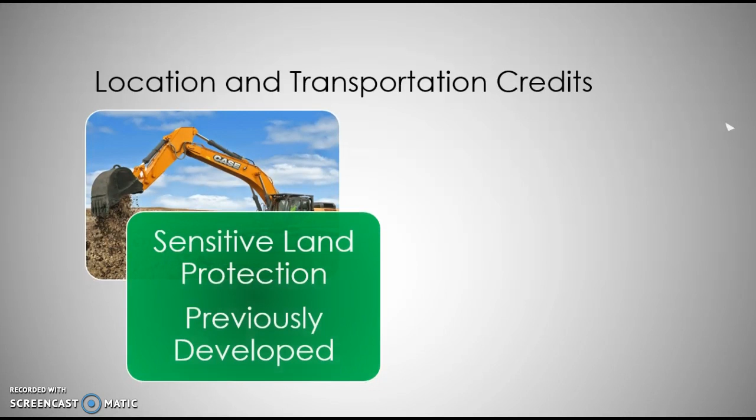For that, I have gained several credits for location and transportation. These include sensitive land protection, as I gained a credit using a previously developed site, and surrounding density and diverse uses, where I gained 2 credits for meeting the surrounding ability to have lots of people in a small area with varied businesses.

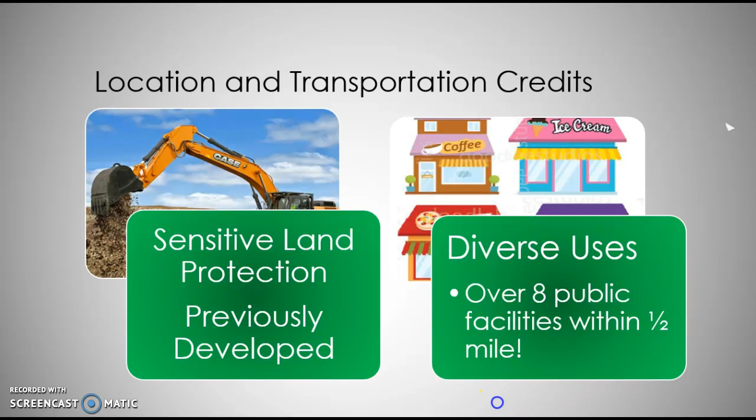I also have access to quality transit, where I have enough public transportation located close by to gain all these credits, and bicycle facilities, where I'm installing 2 shower bath units in the lowest level with a bike rack room for occupants to meet this credit requirement.

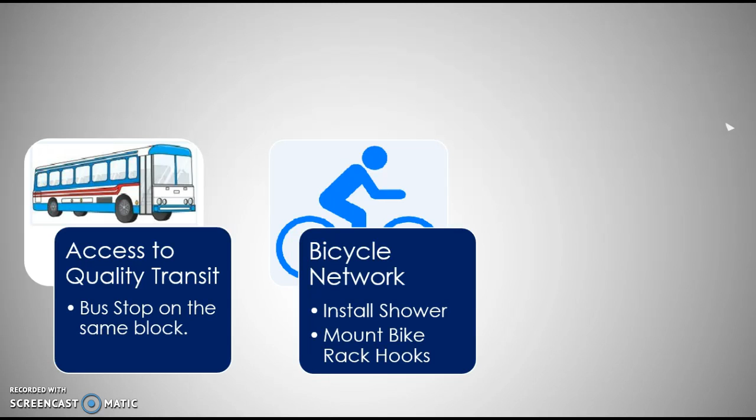I'm also going to have a green vehicle credit, where I designed the building to be up higher, and the first floor will gain parking, so these can be installed for electrical charging stations and preferred parking.

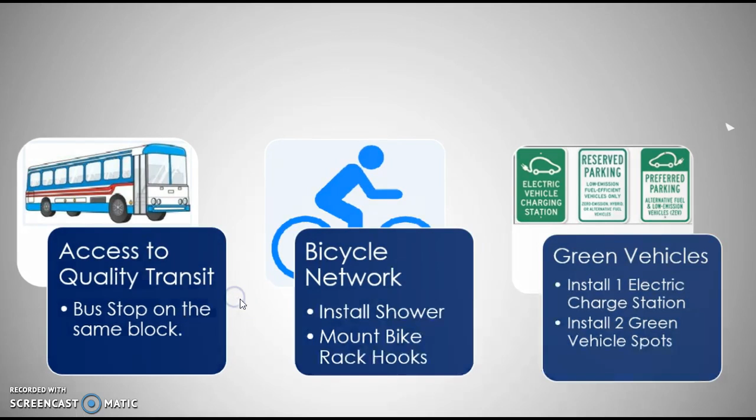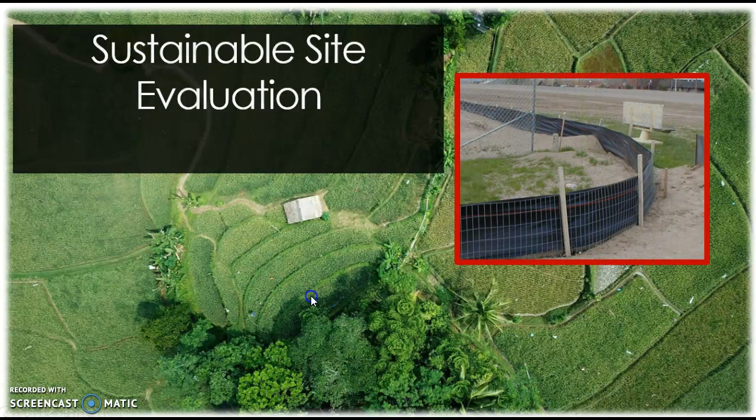For the sustainable sites concept, I also have the prerequisite of needing to install site protection. For this, I would install silt fence, as this would prevent any contamination outside the site.

For sustainable sites, you have site assessment, which I would hire a survey company to provide the required information and documentation. They would be doing site development to protect or restore habitat, and I can also have them provide all kinds of information included in that.

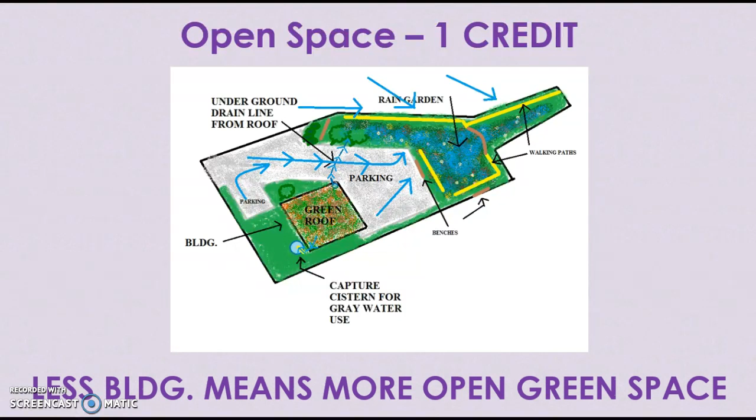Part of the credit there is open space, where 30% of the site will be used as green space and available for recreational use, which you can see by this photo.

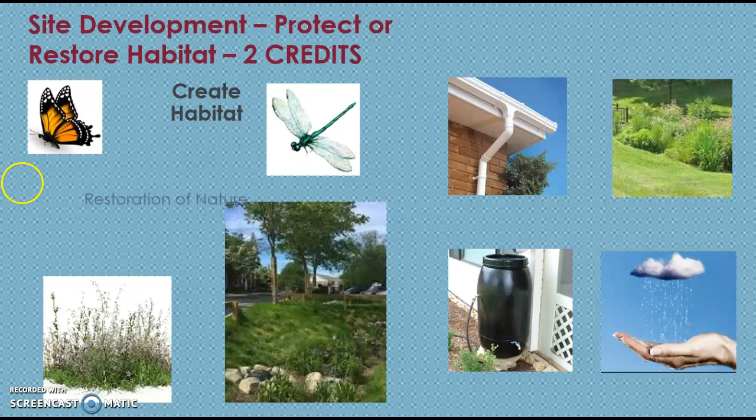Site development is also part of restoring and protecting the habitat, and it would be restored using a rain garden with native plants, which would also help protect wildlife after restoring it.

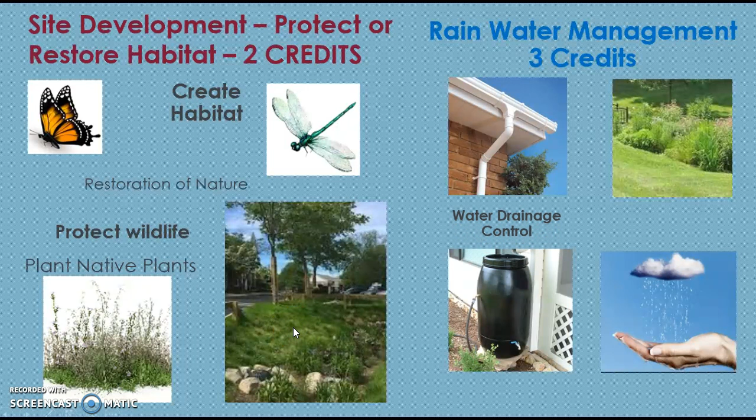For the rainwater management credits, I would gain the ability of having 3 credits for not only water drainage control, but the rain garden and the cistern to capture water for reuse.

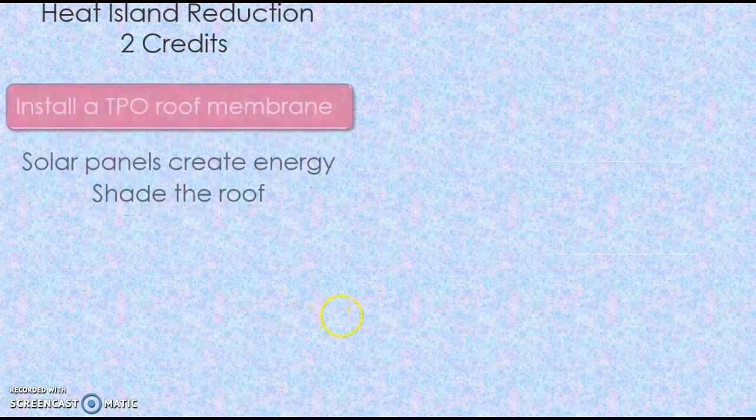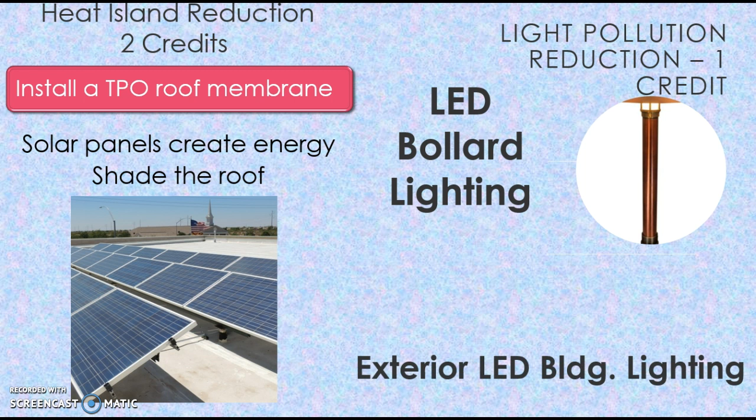As a heat island reduction credit, I would install a white TPO roof membrane and solar panels to help shade the roof as well. For light pollution reduction, I would be installing downward-facing LED bollard lights and LED building lights that also face downward, which will help prevent light pollution.

As prerequisites, I would be required to have an indoor water use reduction, which is water sense label fixtures, outdoor water use reduction, where I provide vegetation that doesn't need irrigation, and I also have a rock garden that won't need water. Any water I need outside will be from the cistern.

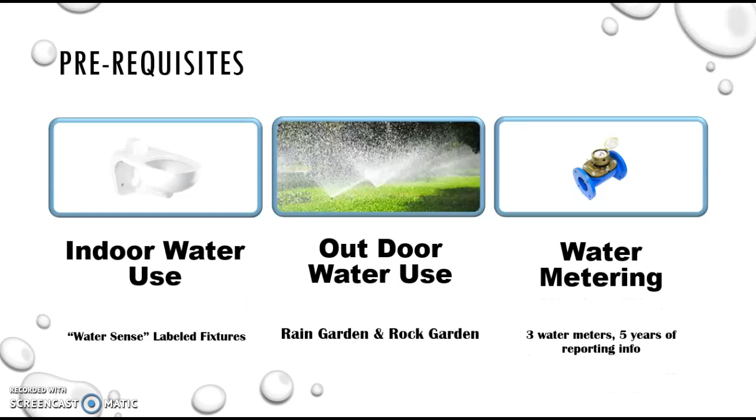I also need to install water metering. Matter of fact, I need 3 meters and 5 years of reporting to cover this credit. I'm not covering the cooling tower, however, because I found my project to be too small for that.

For the energy and atmosphere aspect of LEED accreditation, I also have my prior prerequisite of fundamental commissioning and verification, where I would hire a third-party commissioning agent to perform the work and provide the documentation needed.

I would also have building level energy metering to meet this credit. I'd also have my electrical contractor install metering systems to meet that credit.

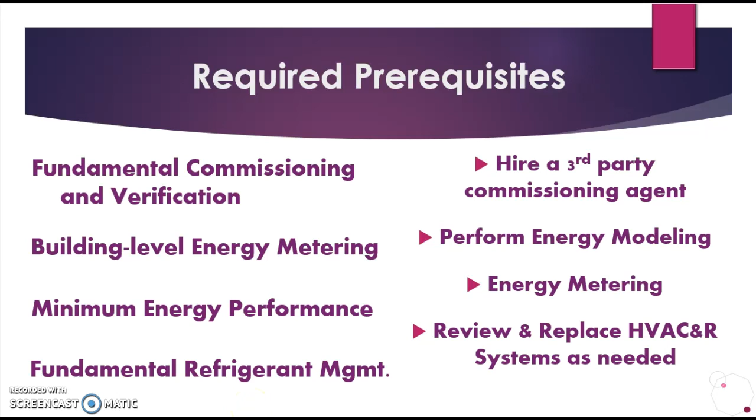Minimum energy performance rating is where all my appliances come in, and the electrical company can provide the documentation for that. I also have fundamental refrigerant management, and this would be provided by my HVAC contractor as a requirement for the installation of his materials.

For enhanced commissioning, I'd hire a second outside commissioning agency to validate all current and ongoing information.

For optimizing energy performance, you'd have your electrical contractor provide documentation, which you would compare everything, document everything, update that information, and track and submit it.

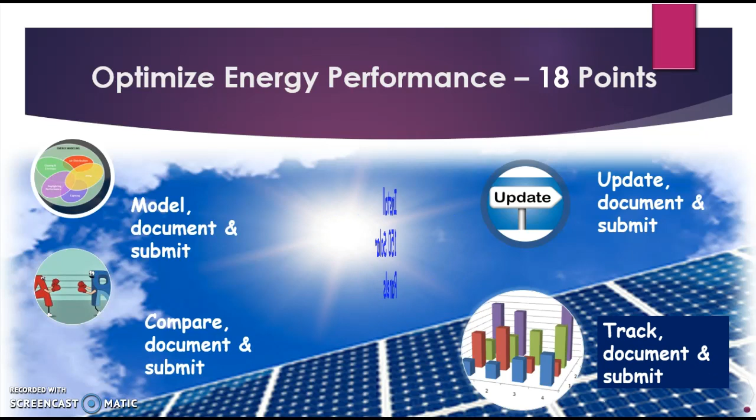It also includes installing 150 solar light panels, and that goes towards my renewable energy production, where I gain 3 credits.

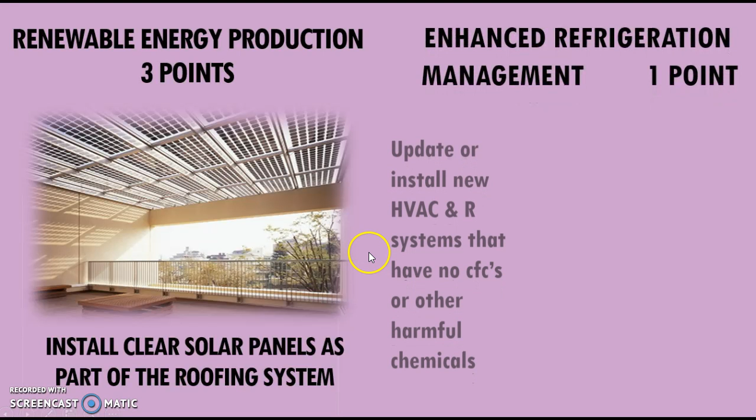For the enhanced refrigeration management point, I have the HVAC and R systems that have no CFCs or other harmful chemicals, and that information is again provided by the HVAC company.

For advanced energy metering, I would have the electrical contractor install metering devices for the solar panel and battery units, as well as continually provide the metering information needed to monitor it. I'd also have a battery-powered backup to assist with this.

For the green power and carbon offsets, I would be creating my own energy and selling it back to the local grid, which nets me green RECs, which can be documented as green power.

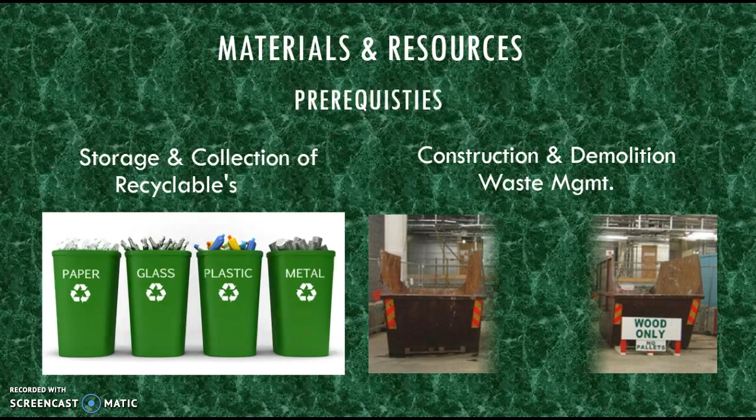For the materials and resources department, I would have storage and collection of recyclables as a prerequisite, with at least 4 types of bins and documentation of their use. I'd also have construction and demolition waste management planning, where I develop and implement a construction demolition waste management plan.

Building product disclosure and optimization, environmental product declarations, I get 2 points, where I could have all this documentation provided to me by my subcontractors. I would also have my certified environmental product declaration and my sourcing of raw materials for post-consumer materials, and they would all be kept well documented.

As part of this, I would also have my construction and demolition waste management submit the documentation for recycling, reuse, and adhere to those requirements.

As a building life cycle impact reduction, I would remove and install a minimum of 50% of the building materials used on site, and or install reclaimed materials from local contractors. There's a lot of materials out there, and these will also help with my acoustical properties.

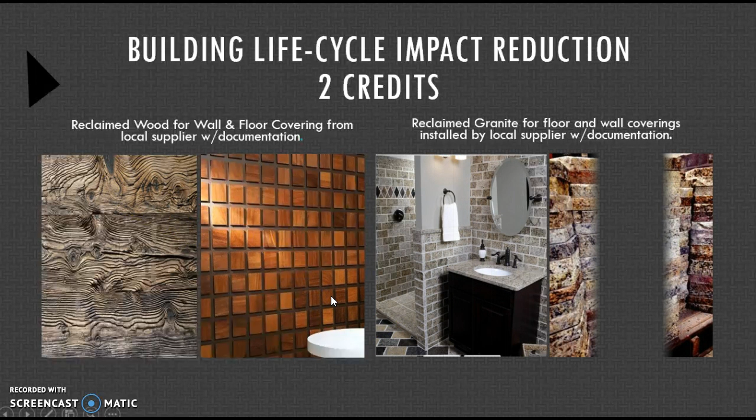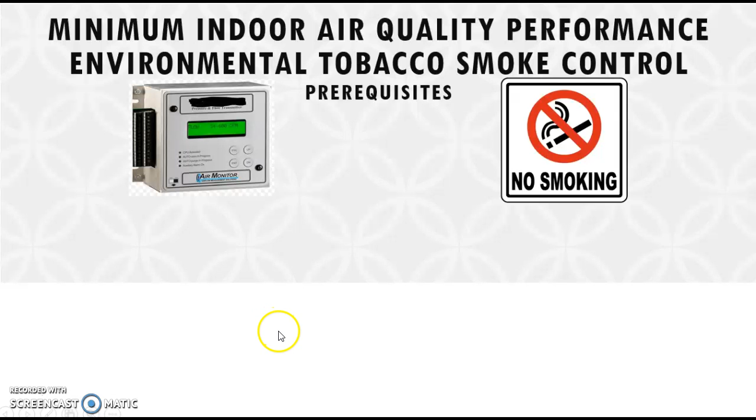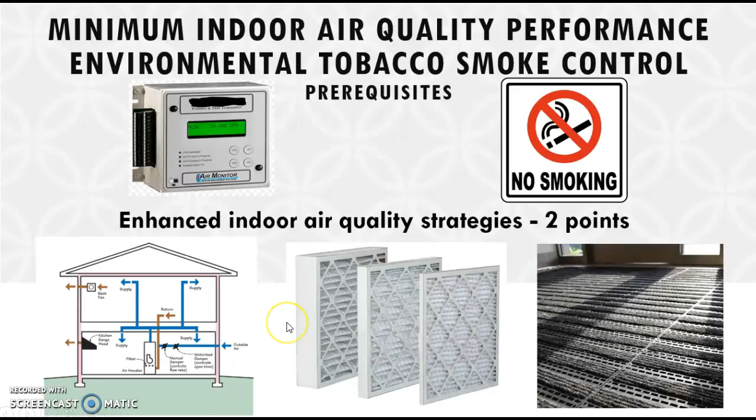For the enhanced indoor air quality strategies, I would include airflow testing, filter installation, and entrance mats to prevent pollutants from coming into the structure.

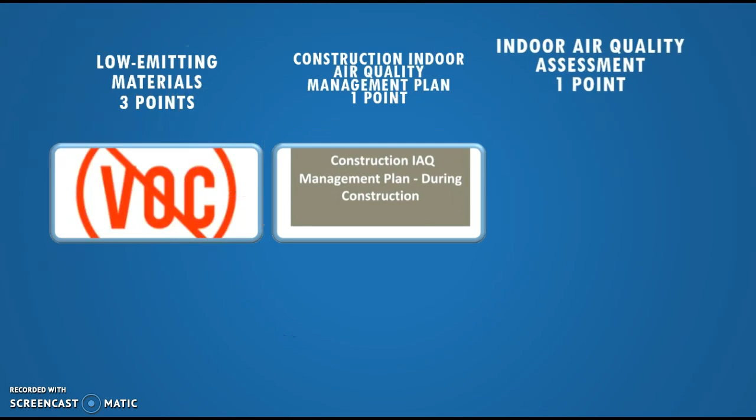I would also have low emitting materials or low VOCs, with the exclusion of those, to create, submit, and follow a construction indoor management plan, and in it perform an indoor air quality assessment, which is a test, and make corrections as needed.

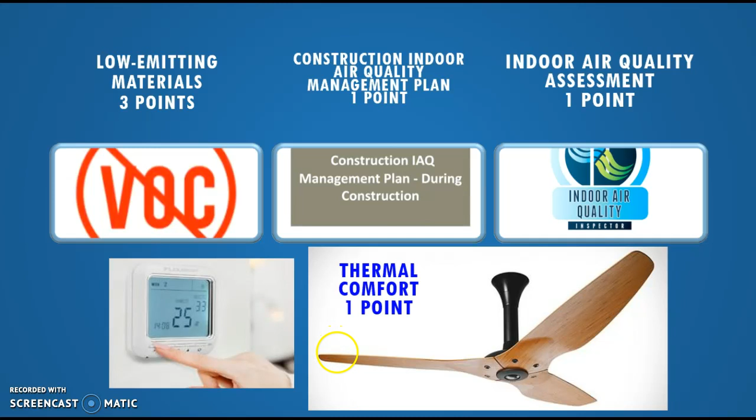For thermal comfort, I would require the HVAC contractor to meet those requirements of standard ASHRAE 55, and set a set of standards for the indoor environmental conditions to achieve acceptable thermal comfort for occupants of buildings.

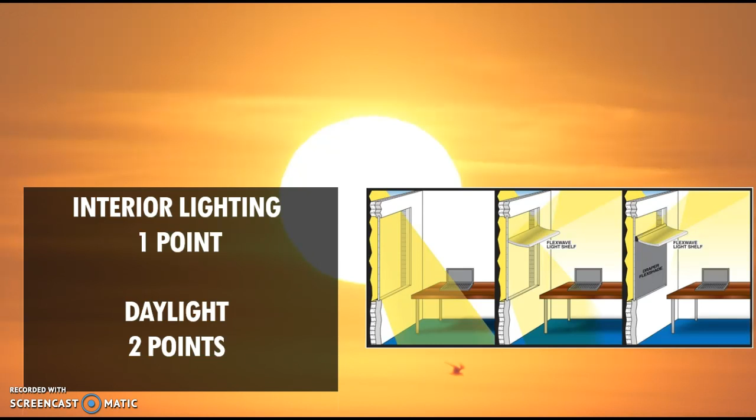I would also have installed light shelves, blinds, and interior colors to balance out the credit requirements.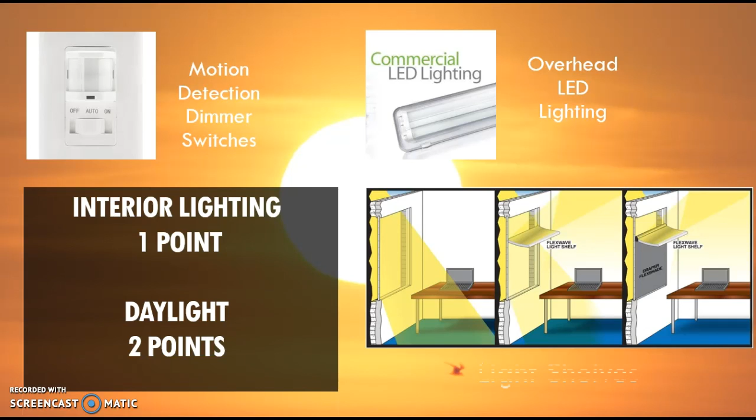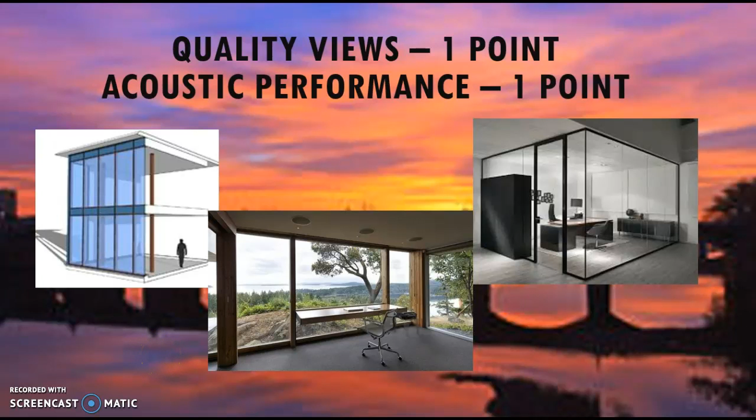For quality views, I would install a curtain wall around the majority of the structure for optimal site visual beautification, and the rain garden will help this, as well as the river view. Any interior walls would be glass, so it will not only assist with the acoustical properties, but bring in a great deal of daylight.

As part of the innovation qualities, I did not chase down any additional methods or innovative ways that aren't already mentioned, as I didn't see the need for such a small project.

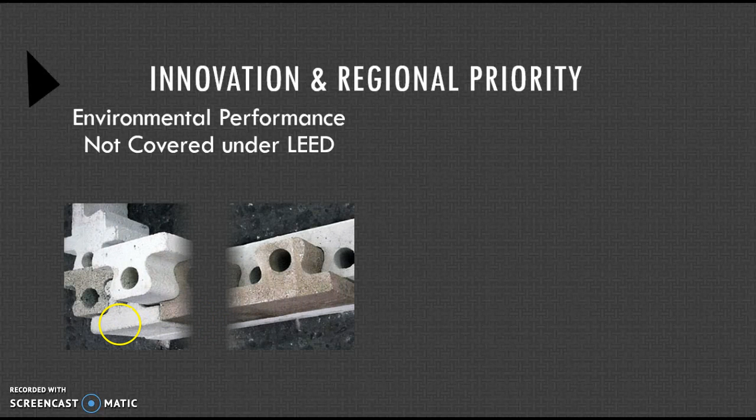I'm also going to have a principal participant of an accredited professional to help me determine if I'm following the right path.

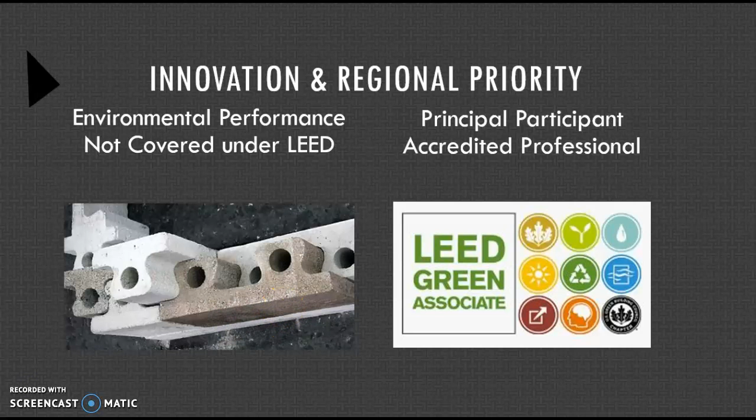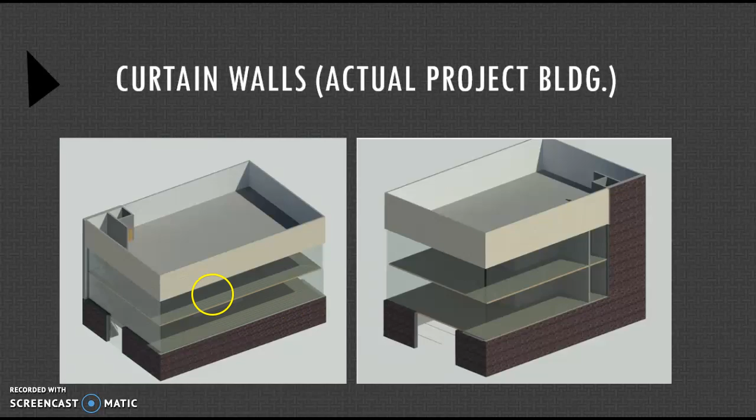And you can see the ultimate floor plan layout. Here you have the very first floor where there's an elevator shaft and parking, as well as a bike rack. The second story has the elevator shaft, stairs, utilities, kitchen, bathrooms, storage. And the third story also has stairs, elevator shaft, vestibules, and storage here, here, and 2 restrooms.

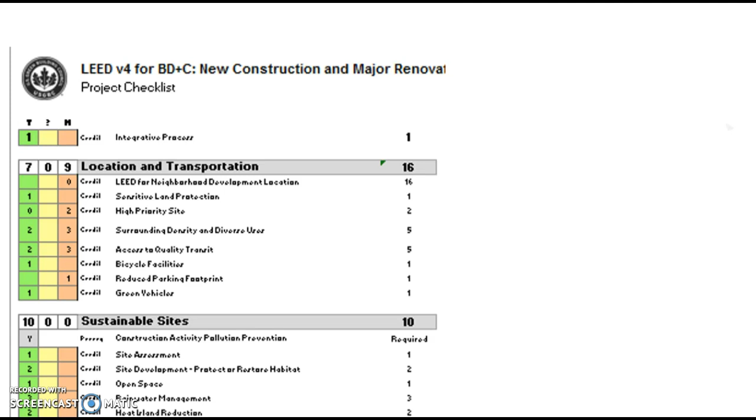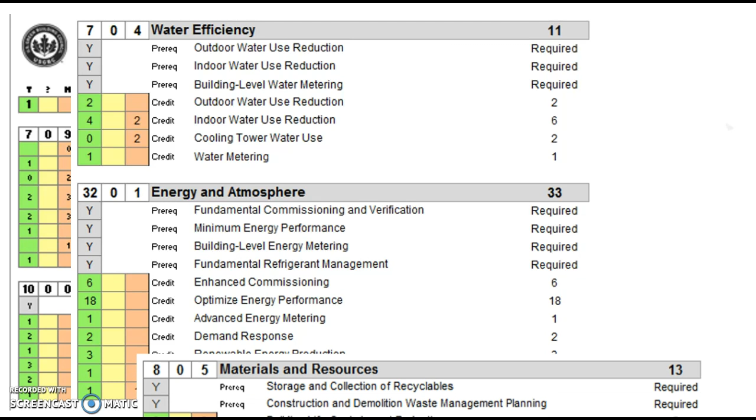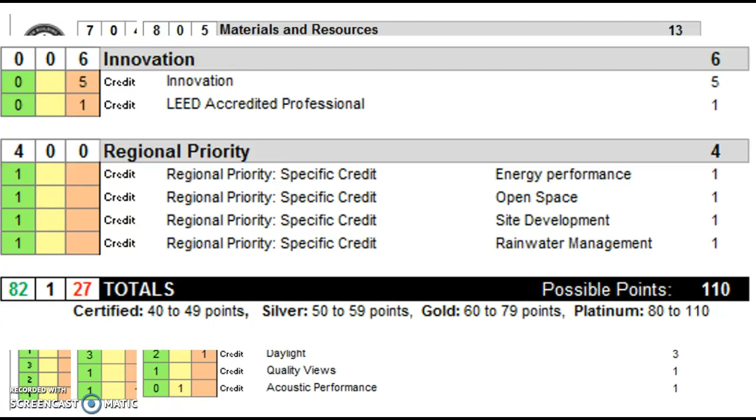As part of my prerequisite credits, I got 7 of 16 for location, 10 out of 10 for sustainable sites, 7 out of 11 for water efficiency, 32 out of 33 for energy and atmosphere, 8 out of 13 materials and resources, 13 out of 16 indoor environmental quality, and a total of 82 credits, which is not what I was trying to reach, but it seemed rather easy after it was all said and done.

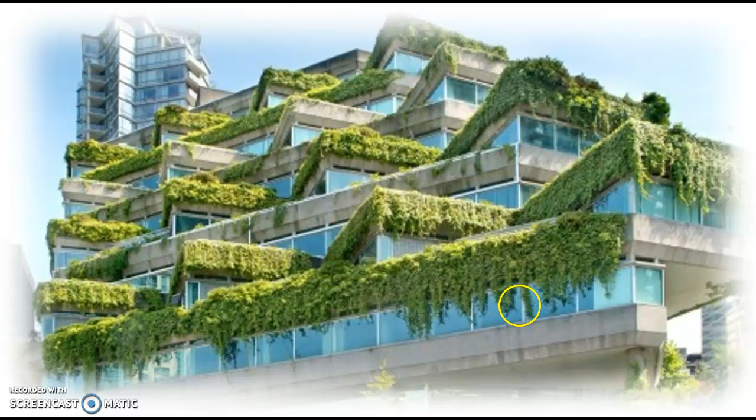Sustainable design needs to be sustainable now. Humans on Earth are running out of resources, and if we don't start creating sustainable design, we are not going to have enough resources to support ourselves on this planet.

It needs to be, and will not be a fad, but it needs to continue being part of our way of life, because when we run out of resources, we are not going to be able to be sustained.

It is the only option for the survival of our species. Thank you.